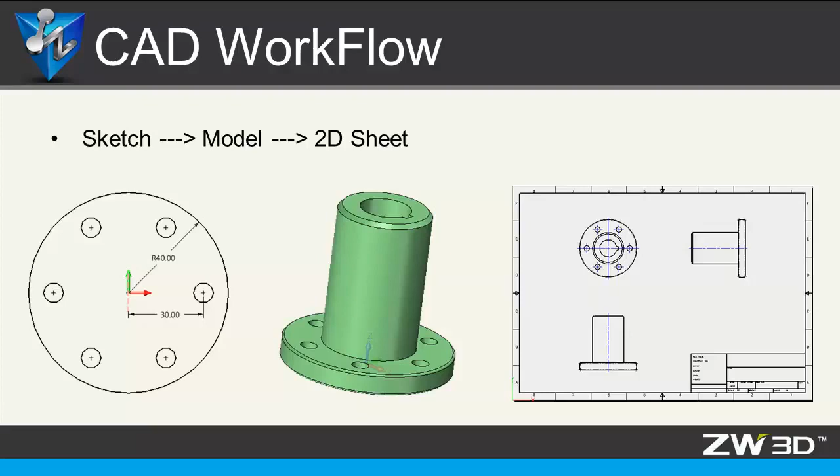This is a ZW3D CAD workflow. With a simple case study, we will learn how to get a ZW3D CAD workflow from a sketch, a modeling design, to a 2D sheet. First, create a new file.

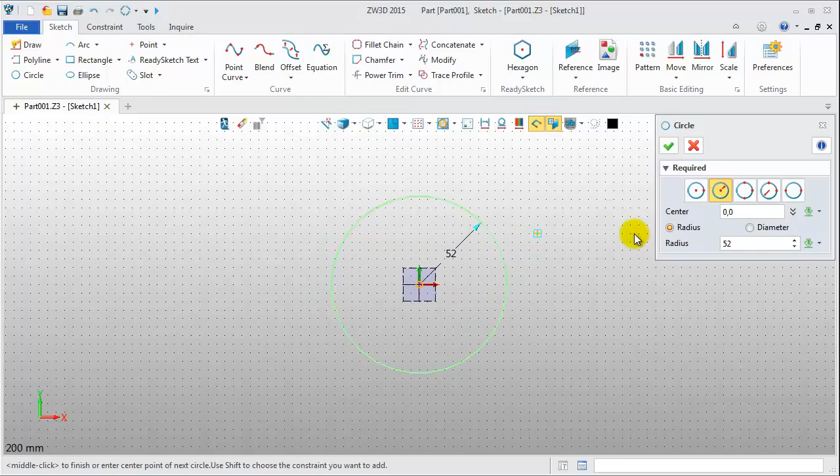Right-click on the working area, click Insert Sketch, pick the XY datum to finish. Drawing the sketch, click Circle. Center is the original point, radius is 40 millimeters. Create the second one, center 30, 0, radius 4.

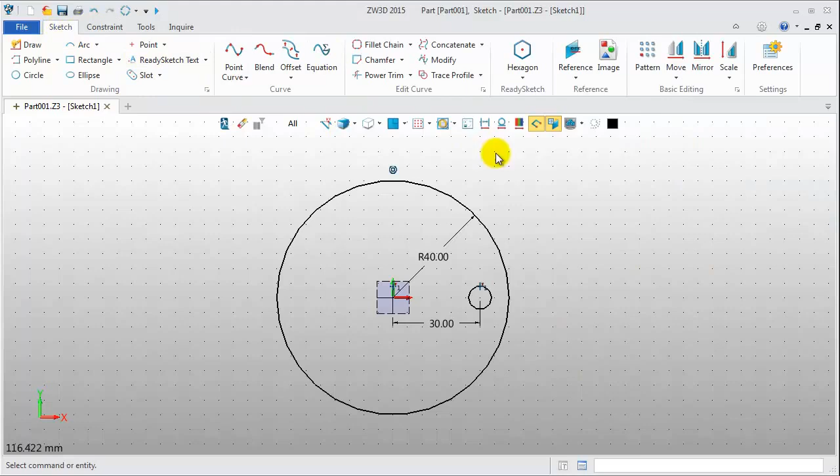Next, add the dimension. Center to center distance is 30. Then make a circle pattern. Pick the small circle, pattern with original point, number 6, angle 60 degrees. So the first step from the sketch is done.

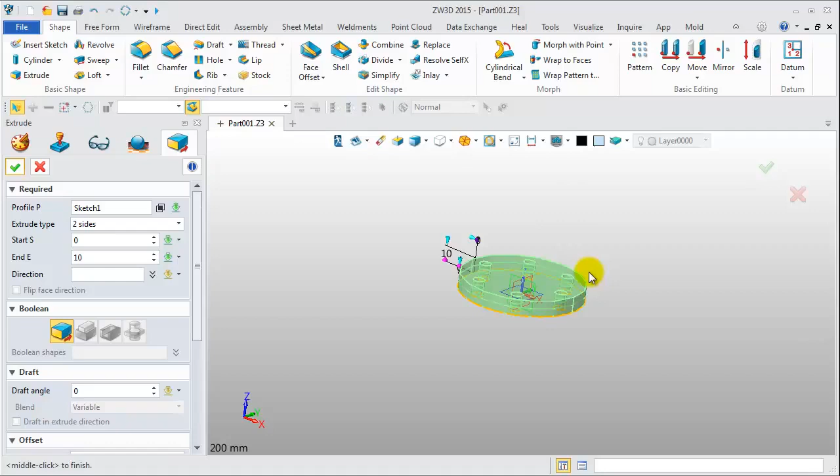Extrude the sketch from 0 to 10 millimeters. Then quickly add a cylinder on the top face, radius 22, length 66.

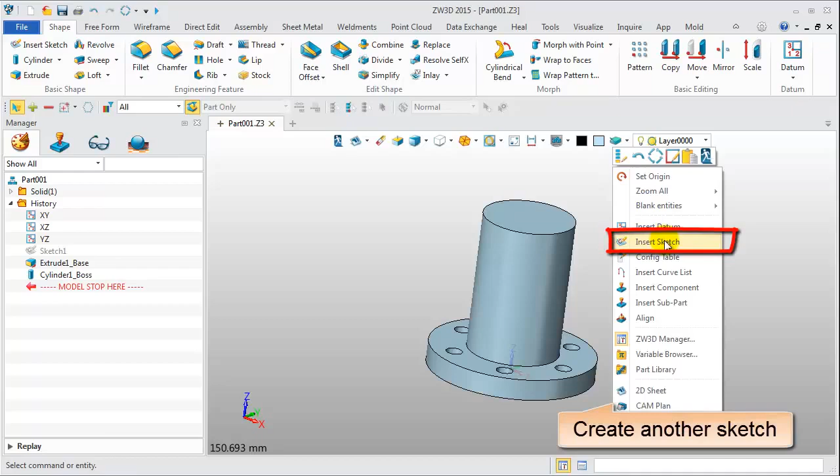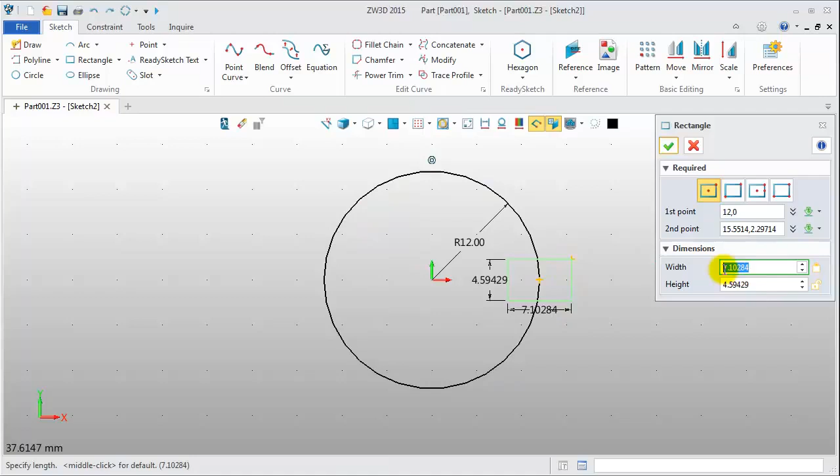Pick the face to insert another sketch. Draw a circle with a radius of 12 millimeters. Add a rectangle like this one, width 4 millimeters, height 5 millimeters. Pick the Power Trim tool to quickly trim the sketch's geometry.

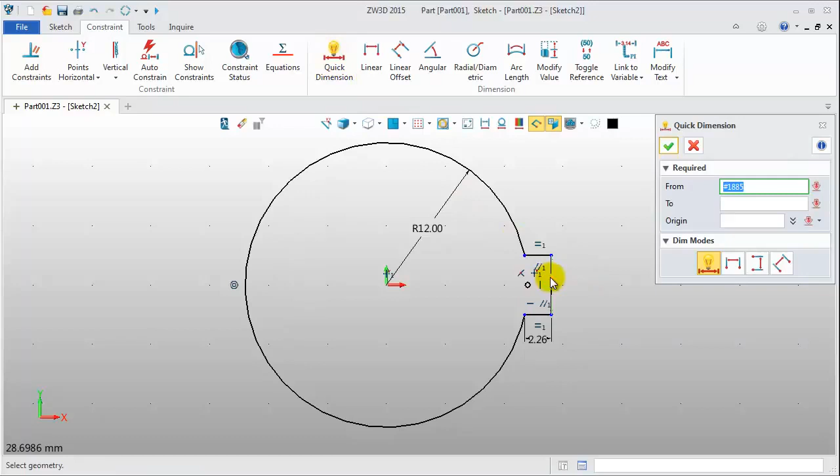Next, add the dimensions and constraints for the sketch. Now it is well defined. Exit the sketch.

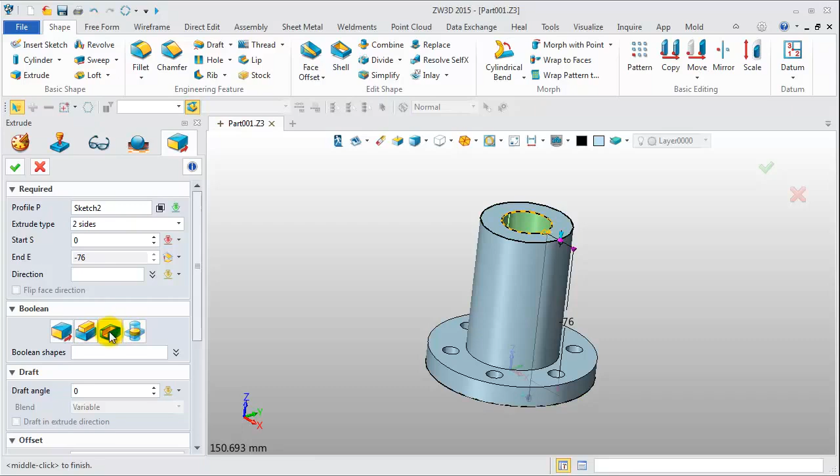Extrude the sketch from top face to bottom face to cut the shape. Add some engineering features such as chamfer and fillet. Now finish the modeling.

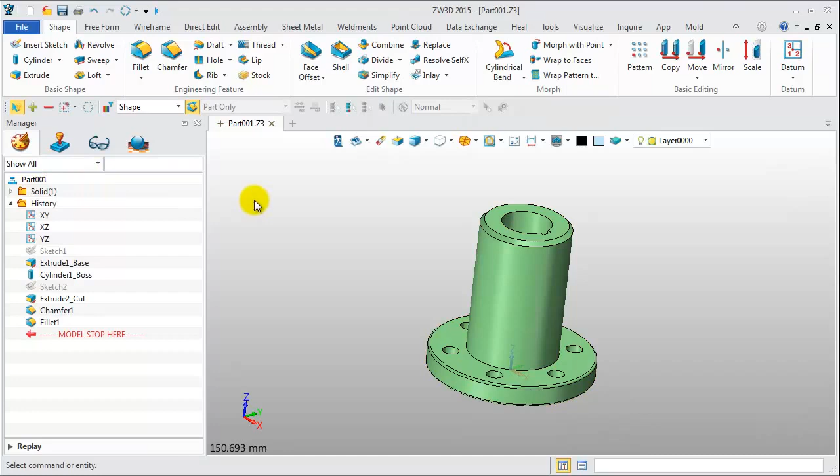Last one, modify the model attribute. Clicking here, we can quickly access the 2D sheet. Create the standard view and projection views.

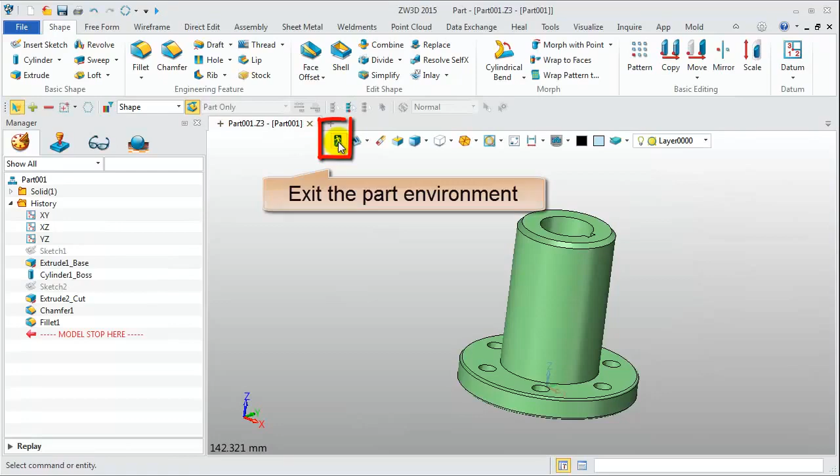Click this icon to exit the part environment. Back in the File Manager, we can preview any file information. Finally, save the file. This is generally a CAD workflow.